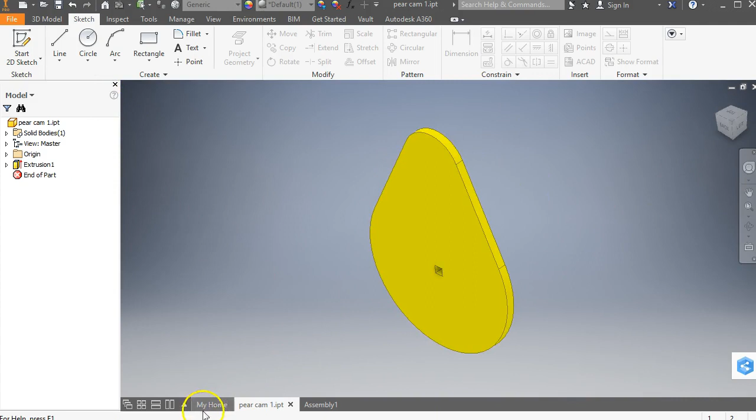So what I'm going to do is choose New, Standard IPT, and click Create. This is the name for the part. I always recommend saving first what you're working on, so we're going to hit Save, which is also Control S. I recommend always using uppercase letters. It makes your drawings look better whenever you finish those and import them into drawings. So give it a name, uppercase.

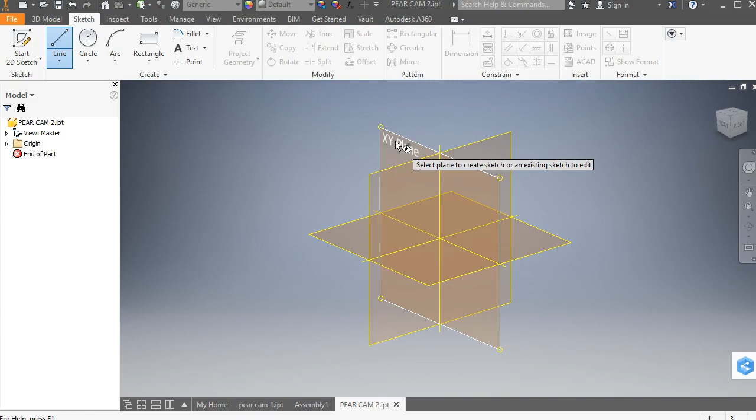First thing we're going to do is start a sketch. So we are going to start with a line, and I'm going to place that on this plane. You can put it on the XY plane, the YZ plane, or the XZ plane. I usually will choose the XY plane because it makes sense mathematically.

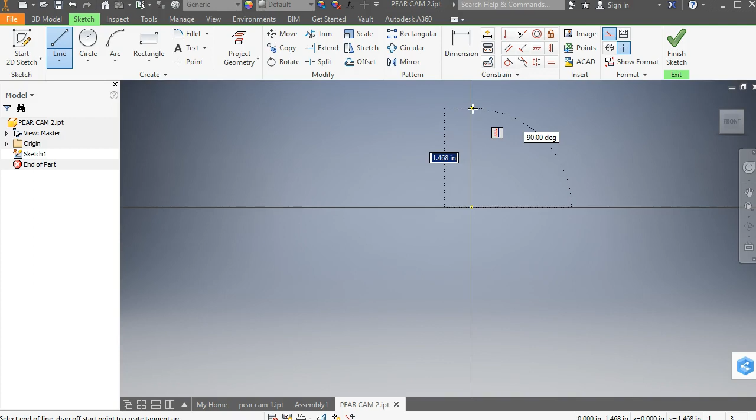What I'm going to also do is make this a construction line. You can see right here, this command is construction line, so I'm going to choose that, and we're going to draw a line that goes along the y-axis, and I'm going to make it 1.75. Hit escape, and now I have a line here. This is going to be the center of my pear cam.

Next thing I'm going to do is add two circles. I'm turning off the construction lines and making it actual lines, and now I'm going to choose the circle, and click at the tip of that line. This upper circle has a radius of 0.5, but the diameter is times 2. You can actually put an equation in there in Inventor, so I'm going to multiply 1/2 times 2, and that's going to give me a diameter of 1 inch.

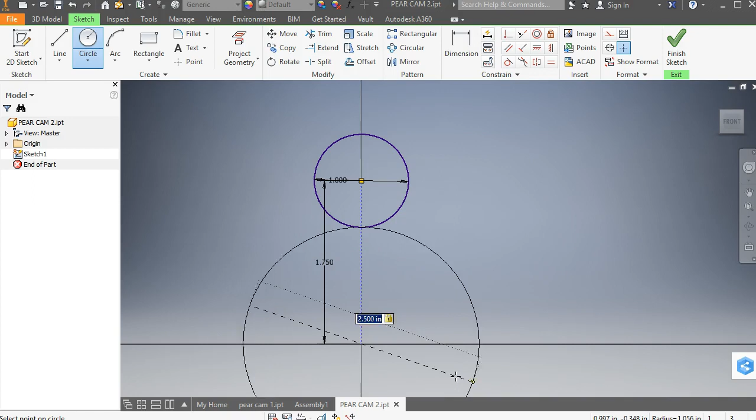Then I'm going to draw another circle here at the other end of the line at the origin, and I'm going to make this circle 1.25 times 2. That gives me a circle that's 2.5 inches across.

Next thing I'm going to do is draw a line way longer than it needs to be, from here to here, close to those circles. Then I'm going to hit escape and draw another line over here, way longer than it needs to be, and then hit escape again. So now I've got two lovely lines.

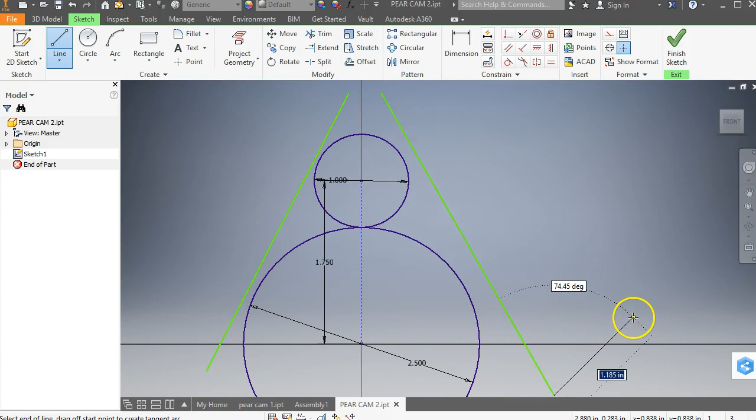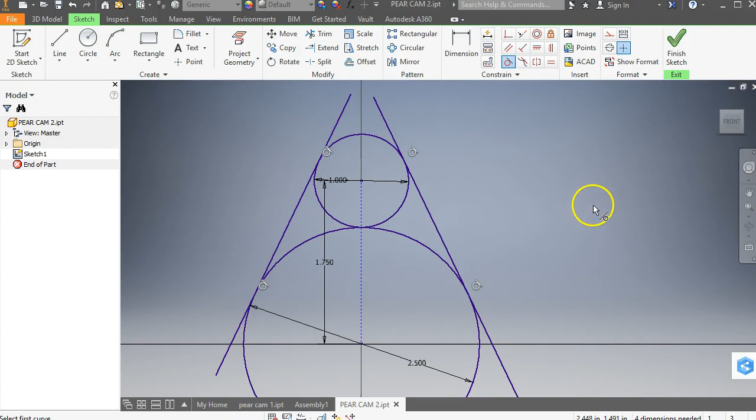I'm going to use the tangent function. I'm going to make this line tangent to this circle, and this line also tangent to this circle, and this other line tangent to this circle as well. Now I need to use the trim tool, to trim anything past the circle, anything inside my shape, and all of that's trimmed off. So now I have the pear shape.

There's also a little square that goes right here, so let's figure out how to do that. We're going to draw a rectangle here, and I'm just going to put it anywhere, and that rectangle is 0.125 by 0.125. Hit enter, and now I have a rectangle.

Let's zoom in there. This is why having a scroll mouse is really important. I'm going to zoom in on that rectangle quite a bit. I'm going to use a construction line, and just real quickly draw a construction line across the center diagonally, across the shape. I can do it both ways, but I only needed one of those.

Let's just do one. Then I'm going to turn off construction lines, click on point, and hover along this line until that selection turns green. That's the midpoint. So I have a midpoint defined in that square. Hit escape a couple of times.

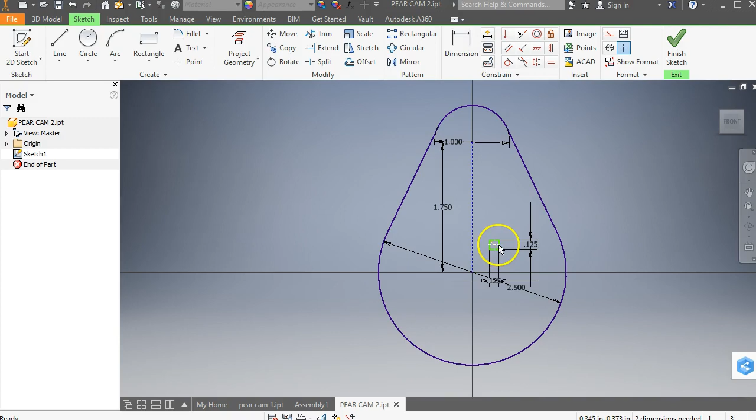What I want to do is apply a coincident constraint. Let me zoom out a little bit, between the center of this little rectangle, or well, it's a square, and the origin point, which is right there. So let's zoom in on that a little bit. I want to do a coincident constraint, so we're going to put 2 points at exactly the same place. I think that's what I want, so let's try it and see.

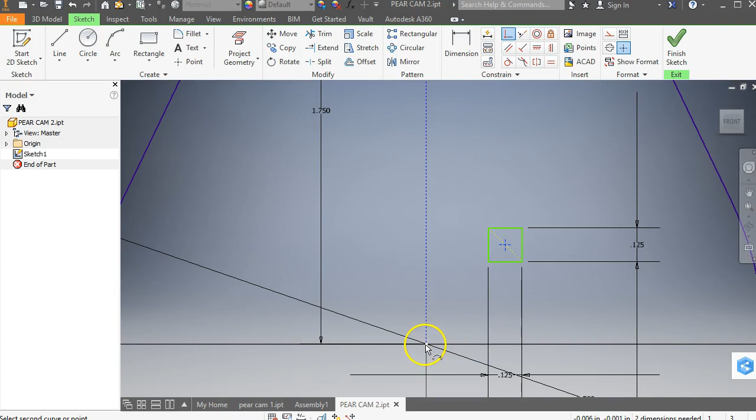So I'm going to choose this point, and I'm going to go to the origin. Zoom in on that and make sure I have the dot at the end. Bam. So sometimes you have to kind of zoom in on things to see where they are.

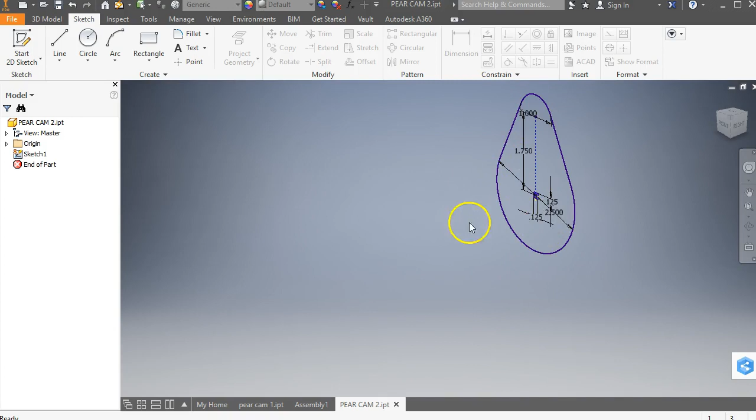So now I have my sketch done, and it looks kind of busy. I have the 1-inch circle at the top, 2.5-inch circle at the bottom, this center line between the centers of those two circles, these 2 lines that I added here to trim everything out, and this little square in the middle.

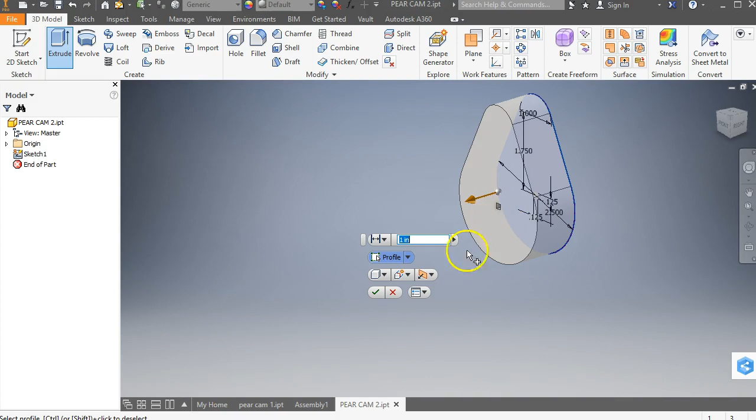Now we can go to 3D model, choose extrude, and I click on this area - see how it's got the little hole there? That's exactly what I wanted. I look at my diagram, it says 0.125, and that is my Pear Cam. If I go to home, it will center that up for me.

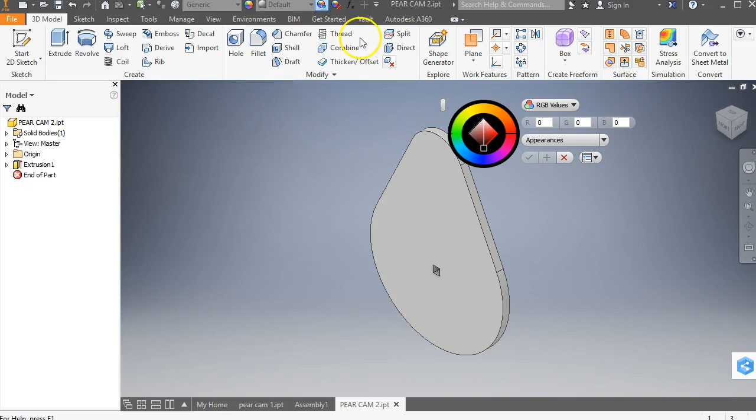Another thing I can do is choose this little circle here that says adjust, and if I click on that one, I can pick a color and make it any kind of color that I want. I like to play with the colors a lot. Another thing you can do is choose different materials, and some work better than others. So you can go through these, like here's the light red, but I kind of like the flexibility you get here. So anyway, that is how you construct a Pear Cam using Inventor.

Save your work, and you are done with that part.